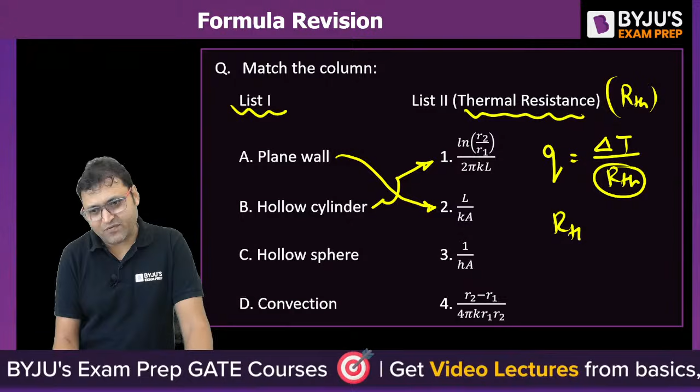We can find the unit of thermal resistance from this expression: delta T upon thermal resistance. So the unit of thermal resistance is delta T by Q, which can be called either Kelvin per watt or degree Celsius per watt. Both are correct. For a hollow sphere, it is R2 minus R1 upon 4 pi K R1 R2, where R1 is the inner radius and R2 is the outer radius. Do not get confused between cylinder and sphere.

If it is convection, then it is analyzed using Newton's law of cooling. According to Newton's law of cooling, Q equals H into surface area available for convection into bulk temperature difference. If we equate this with delta T upon thermal resistance, Q equals delta T upon thermal resistance, then the thermal resistance becomes 1 upon HA.

So it will be 2, 1, 4, 3. Isn't it? 2143. Very nice.

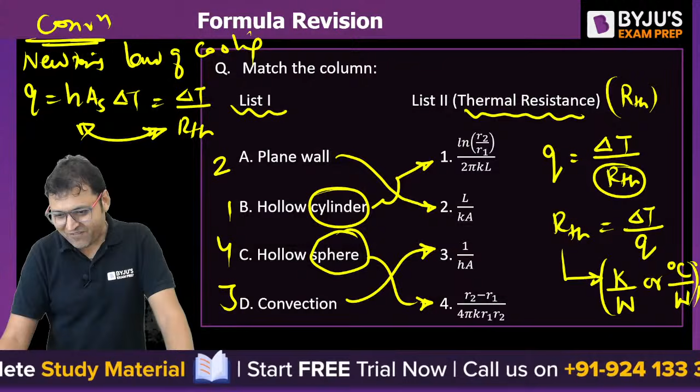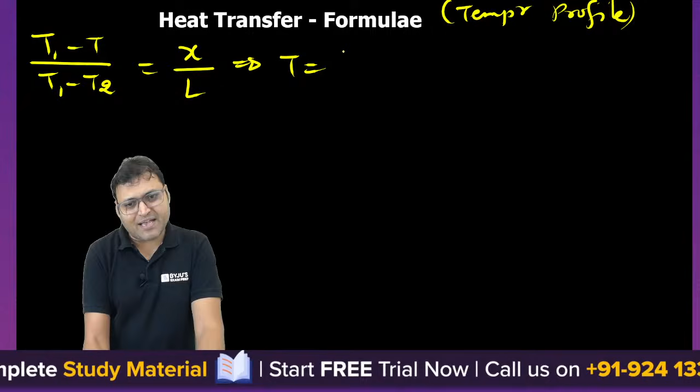Look at the temperature profile for various systems. Do you remember the formula for temperature profile? What is the nature of temperature profile in case of a plane wall? T1 minus T upon T1 minus T2, that is given by X by L. So temperature as a function of X will be linear. The nature of temperature profile will be linear in case of a plane wall.

In case of a plane wall, this is the formula. In case of hollow cylinder, what is the nature of temperature profile? This is the nature of the temperature profile in case of hollow cylinder, isn't it? The nature is logarithmic, for a hollow cylinder.

And the nature of temperature profile is 1 upon R1 minus 1 upon R, upon 1 upon R1 minus 1 upon R2, in case of hollow sphere. The nature of the temperature profile is hyperbolic in case of hollow sphere.

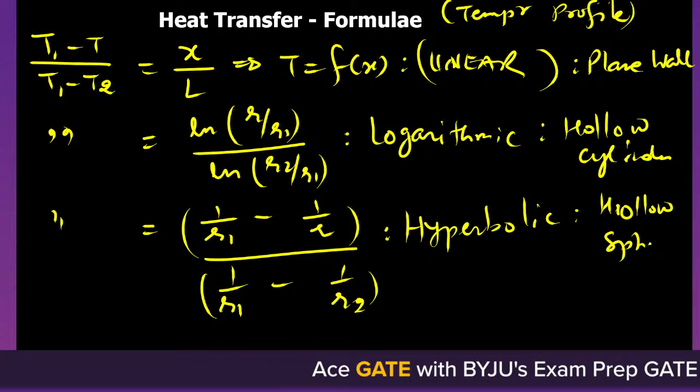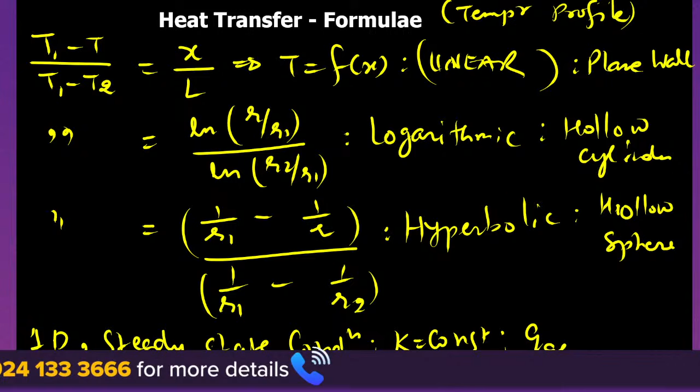But these formulas are valid only in case of one-dimensional steady state heat conduction, with constant thermal conductivity and no heat generation. If these assumptions are taken into consideration, then we can apply these formulas for the temperature profile.

What is the rate of heat transfer? Q equals KA delta T by L, which equals delta T upon thermal resistance. So we can say thermal resistance is given by L by KA, for a plane wall. And what is the rate of heat transfer in case of hollow cylinder? It is 2 pi KL delta T upon ln of R2 by R1. If we equate this with delta T upon thermal resistance, we can find the value of thermal resistance for a hollow cylinder.

What is the expression for Q in case of hollow sphere? It is 4 pi K R1 R2 delta T upon R2 minus R1, isn't it? That is equated with delta T upon thermal resistance, and we can find the expression for thermal resistance in case of hollow sphere.

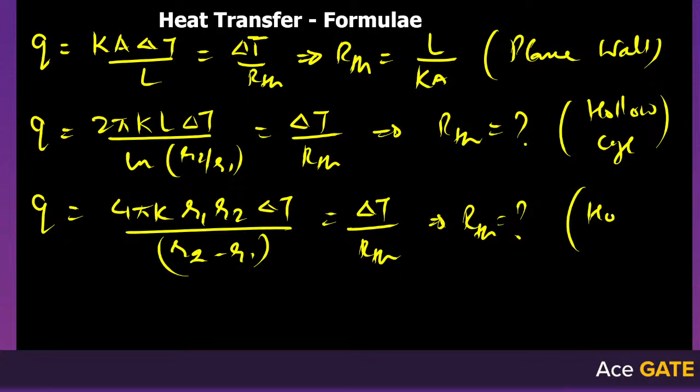These are the important formulas you should memorize. K is the thermal conductivity, L is the thickness, and in case of a cylinder, L is the length of the cylinder. I hope this is clear to everyone, isn't it? Let us move further.

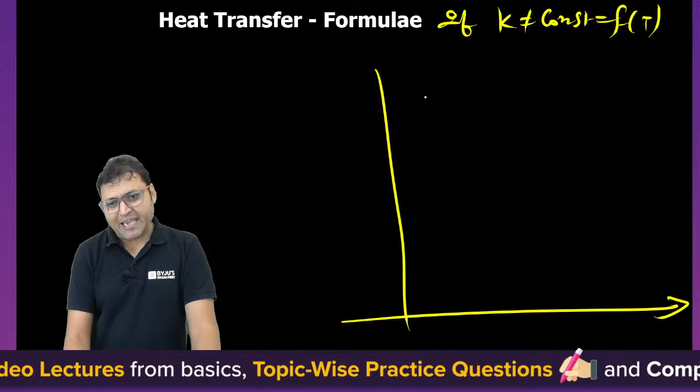How does thermal conductivity vary with temperature? Do you have any idea? If K is not constant, K is a function of temperature. So how does thermal conductivity vary with temperature? In case of liquid or conductor or metals, the thermal conductivity decreases as temperature increases. In case of gas or insulator or non-metal, the thermal conductivity increases with increase in temperature, and in case of a gas, the thermal conductivity is directly proportional to root T. I hope you are aware about this.

Hi Pejal World, good morning, welcome. Very nice. Money, well done guys, well done. Are you aware about that?

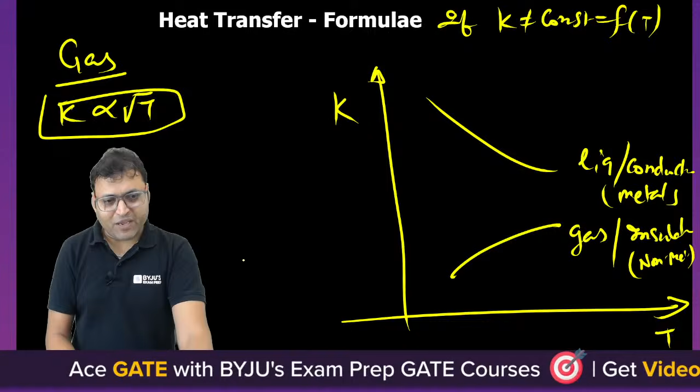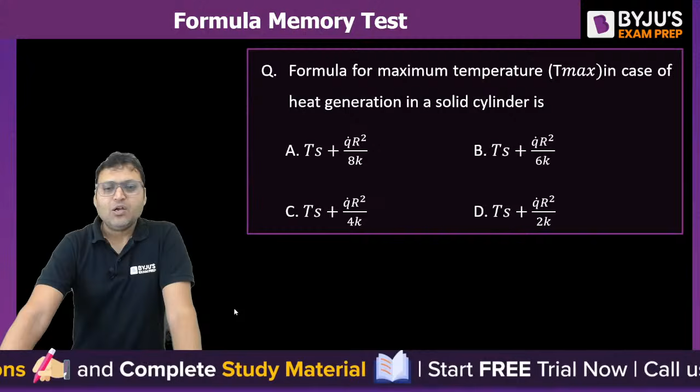Then again, an important concept. Whenever there is heat generation in the system, there can be heat generation in a plane wall, there can be heat generation in case of a cylinder, a solid cylinder, there can be heat generation in case of a solid sphere. Whenever there is heat generation, what will be the formula for maximum temperature in case of a solid cylinder? What will be the answer? Tell me first, you tell your answer, then I will tell mine.

Whenever there is heat generation, the temperature profile is a parabola. Temperature as a function of x is parabolic in nature. For a plane wall, temperature will be parabolic, and the rate of heat transfer is linear. If we talk about a plane wall, the temperature profile will be parabolic and the rate of heat transfer will be a linear function of x. The heat transfer will be taking place in two ways.

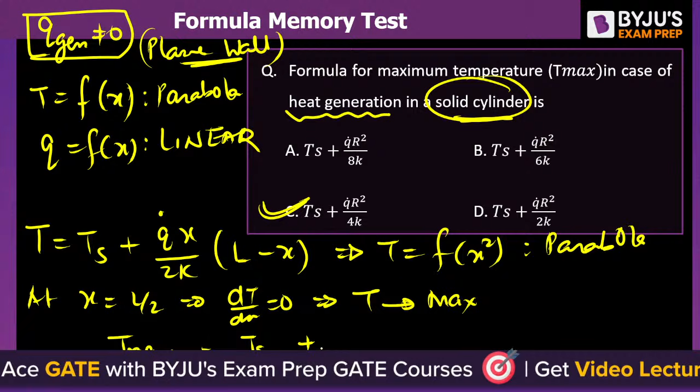If it is a solid cylinder, then this will be the maximum temperature. Let us talk about the plane wall first with heat generation. So the temperature profile is given by Ts plus Q dot x by 2K into L minus x. This is the expression for temperature profile, so we can say temperature is a function of x square, that is parabola. And at x equal to L by 2, dT by dx is equal to 0, so T will be maximum. The expression for maximum temperature is Ts plus Q dot L square by 8K.

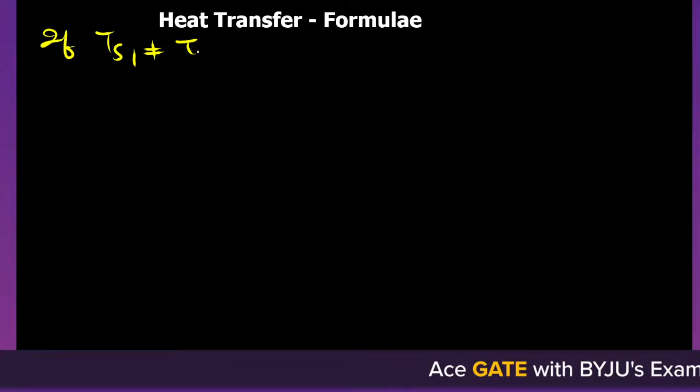This is when Ts1 equals Ts2 equals constant. When the inner surface temperature and outer surface temperature is Ts, then dT by dx will be 0 at x equal to L by 2, and T maximum is Ts plus Q dot L square by 8K. If Ts1 is not equal to Ts2, then T maximum can be calculated by either Ts1 plus Q dot by 8K into 2L1 whole square, or we can write it as Ts2 plus Q dot by 8K into 2L2 whole square. So this is the expression.

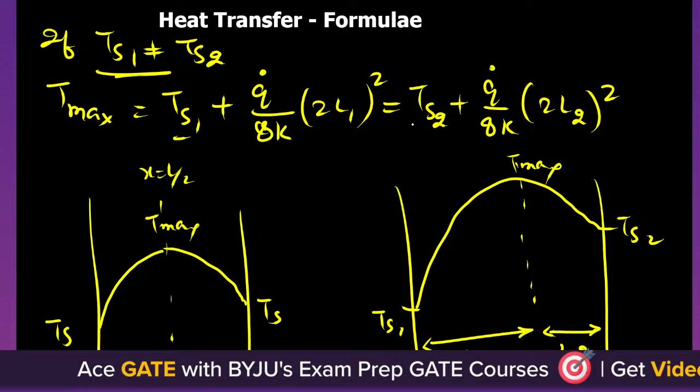If we draw for Ts1 equal to Ts2, the parabola will be symmetrical about the mid plane because this is also Ts, this is also Ts, so the maximum temperature is at x equal to L by 2. But if Ts1 is not equal to Ts2, if Ts1 is less than Ts2, then the parabola will be something like this. So this is the point of maximum temperature, here the temperature will be maximum. This distance is, let us say, L1, this distance is L2. So by using L1, L2, Ts1, Ts2, we can find out the expression for maximum temperature.

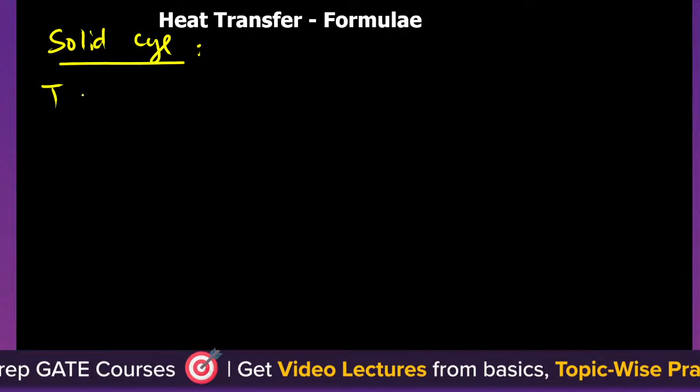And Q will be 0 where the temperature is maximum, because dT by dx is 0 there. The direction of heat flow will be towards left also, towards right also - the direction of heat transfer will be left and right on both sides. In case of a solid cylinder with heat generation, T is equal to Ts plus Q dot by 4K into capital R square minus small r square. It is a parabola, and Q is a function of R square.

Q is a function of R square. At R is equal to 0, center temperature will be maximum, that is equal to Ts plus Q dot capital R square by 4K. If it is a solid sphere with heat generation, then T is equal to Ts plus Q dot by 6K into capital R square minus small r square. It is also a parabola.

And Q is a function of R cube. At R is equal to 0, temperature is maximum, that is Ts plus Q dot by 6K into R square, where Q dot is watt per meter cube, that is rate of uniform heat generation per unit volume.

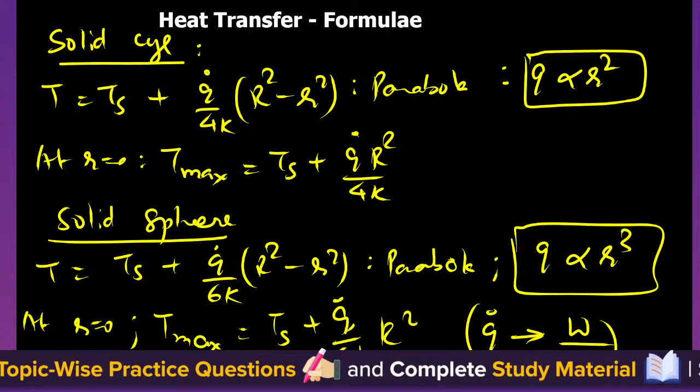So the correct answer to the given question is option C. This is for solid sphere. This would have been for a solid sphere. And Q dot L square by 8K, there is no R. Q dot L square by 8K would have been for a plane wall.

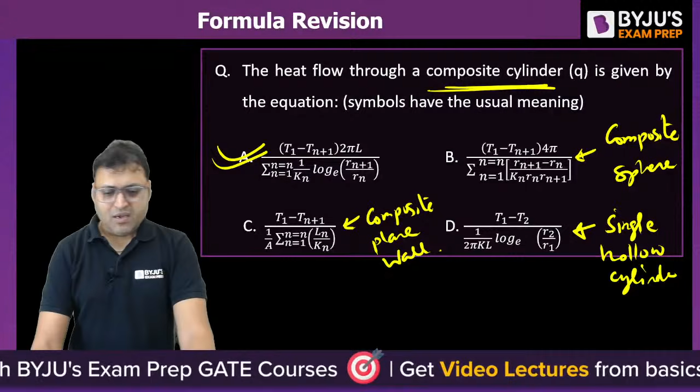Let us try to understand the composite system. Q, which is equal to delta T upon thermal resistance, can be written as U into A into delta T overall. That remains constant. So from here we can say U is equal to 1 upon A into thermal resistance.

For a composite, U is the overall heat transfer coefficient.

Hi Arnab, good morning. I am all fine. How are you?

Overall heat transfer coefficient. And what is the thermal resistance? If there is a convection also, then it will be 1 by A, 1 upon Hi plus summation of J is equal to 1 to N, Lj by Kj plus 1 upon H naught.

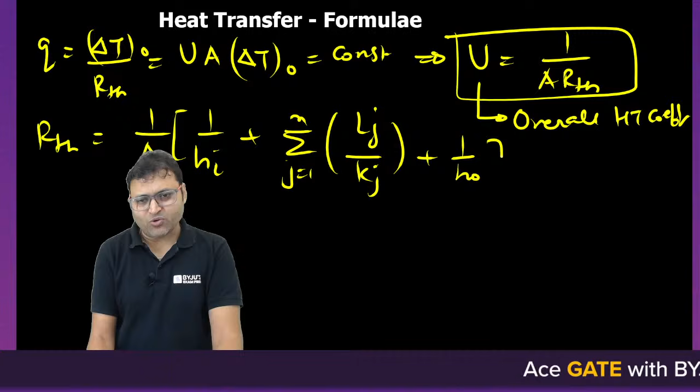If there is no convection given, then delta T upon RTH will give you Q. Or if you want to find out the thermal resistance, then this will be the expression for a plane wall, or composite wall. This is the expression for a composite wall.

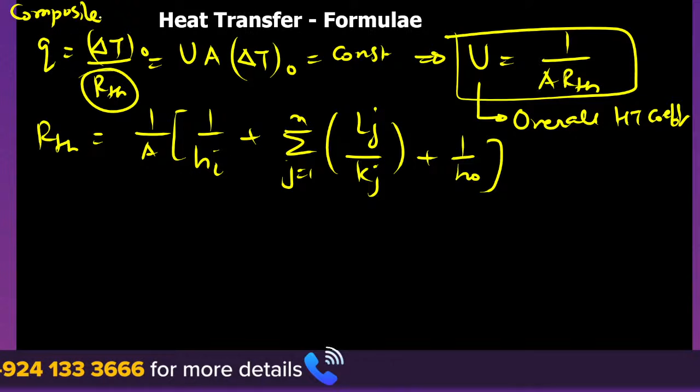For a composite cylinder,

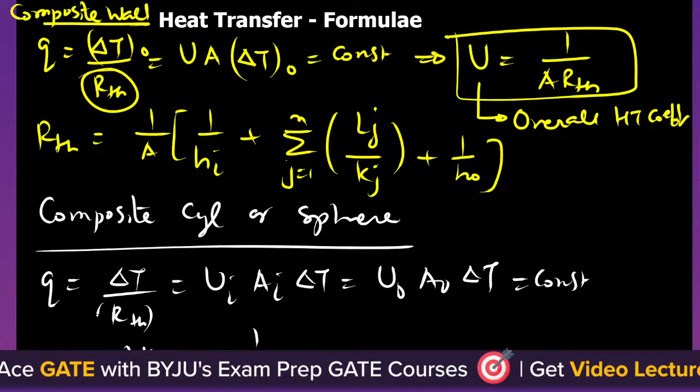From here we can write Ui as 1 upon Ai into R equivalent. This is R equivalent, let me write it as equivalent thermal resistance. And U0 is equal to 1 upon A0 into R equivalent.

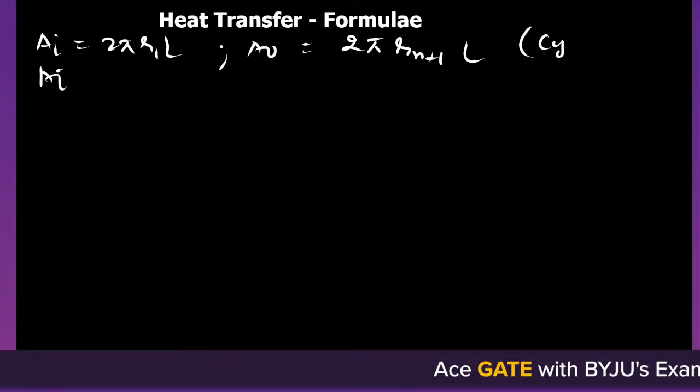Ai and A0: Ai is equal to 2 pi R1L for a cylinder, and A0 will be equal to 2 pi Rn plus 1 into L. For a sphere, this is for a cylindrical system, and for a spherical system it is 4 pi R1 square, and A0 will be equal to 4 pi Rn plus 1 square for a sphere.

R equivalent for a cylinder is equal to 1 upon 2 pi L, then 1 upon Hi into R1 plus summation of j equal to 1 to n, then ln of rj plus 1 upon rj, upon kj, then plus 1 upon h naught into rn plus 1. This is the expression for a cylinder.

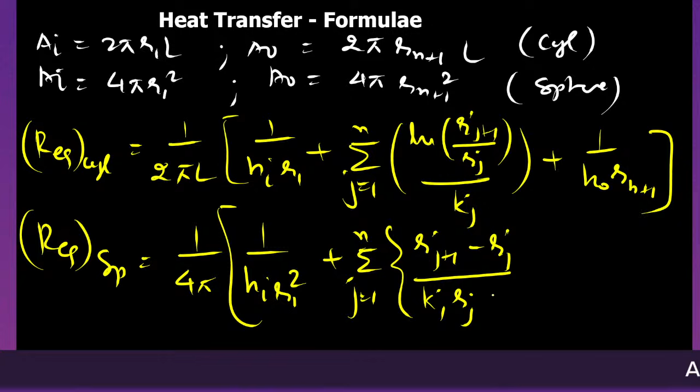And R equivalent for a sphere will be equal to 1 upon 4 pi, then 1 upon hi into r1 square plus summation j equal to 1 to n, then rj plus 1 minus rj upon kj, plus 1 upon h naught into rn plus 1 square.

These are the expressions for equivalent thermal resistance for a composite cylinder as well as composite sphere. I hope this is clear. So the session is about the revision of the important formulas.

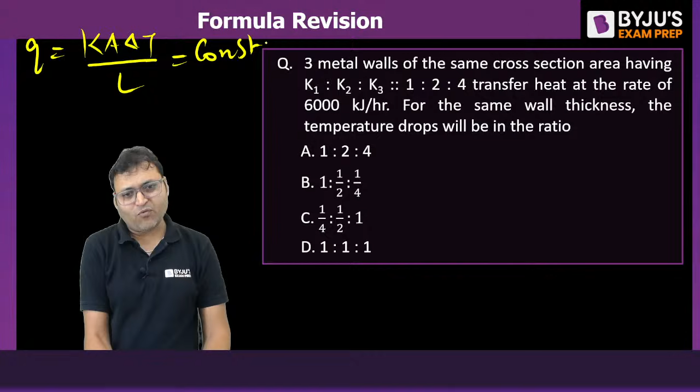We can say Q equals Ka delta T by L remains constant because the walls are in series. For series combination, Q remains constant. Thickness and cross-sectional area are the same, so delta T is inversely proportional to thermal conductivity. So delta T1 : delta T2 : delta T3 equals 1/K1 : 1/K2 : 1/K3, that is 1 : 1/2 : 1/4. B will be the correct answer.

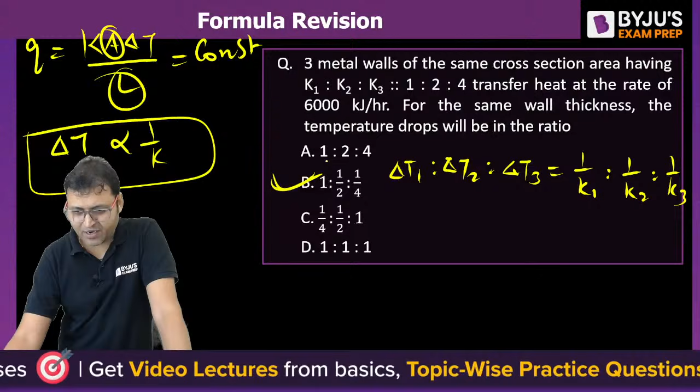Yes, Arnab, Pejal, Naruto, well done Vinay, good.

So whenever the resistances are connected in series, for series combination, Q will remain constant. And delta T, overall thermal potential, will be delta T1 plus delta T2 plus delta T3 and so on. So equivalent thermal resistance will be the sum of R1 plus R2 plus R3 and so on.

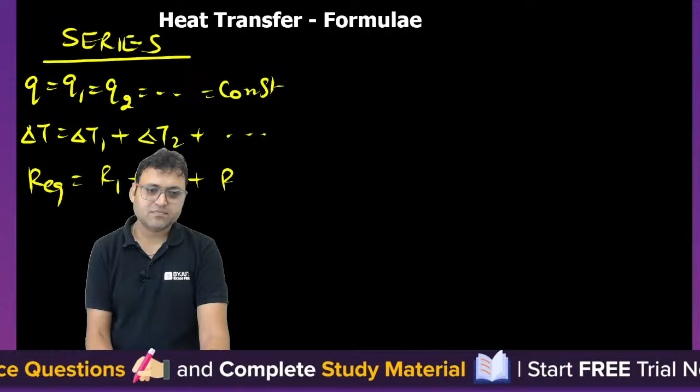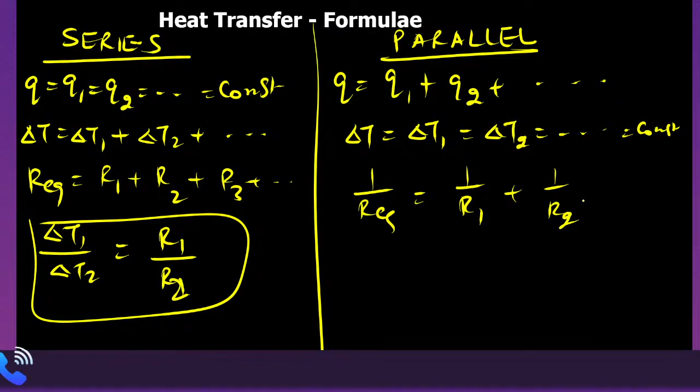From here, delta T1 by delta T2 is equal to R1 by R2, that is for the series combination of thermal resistances. And if the thermal resistances are connected in parallel, then Q will be Q1 plus Q2 plus Q3. Overall thermal potential is the same as the thermal potential across resistance 1 or resistance 2 and so on, delta T remains constant. So 1 upon equivalent thermal resistance will be 1/R1 plus 1/R2 plus so on. From here, Q1 by Q2 equals R2 by R1 for parallel resistances, right?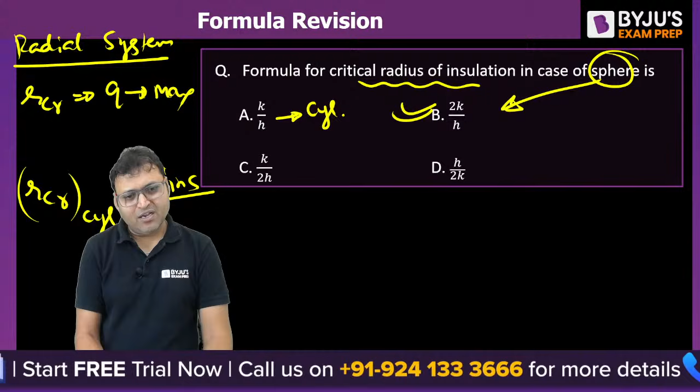The formula for critical radius of insulation in case of a sphere is 2K by H. If it would have been a cylinder, it would have been K by H, for the radial system. Up to RCR, the critical radius of insulation, Q will become maximum. So the RCR for a cylinder will be equal to K of insulating material upon H outside, and RCR for a sphere will be equal to twice K of the insulating material upon heat transfer coefficient of the medium in contact with the insulating material.

Sometimes thickness of insulation is also asked. TCR equals RCR minus R naught. That is called critical thickness of insulation, which gives the maximum heat transfer rate.

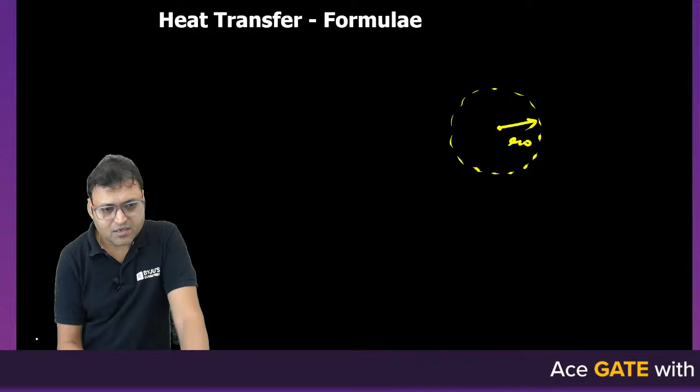Critical thickness, this is simple, but one thing is asked many times. This is the original radius, let's say, for a radial system. This is let's say R naught and this is let's say RCR, critical radius. So when the radius equals the critical radius, the heat transfer rate will become maximum and then it will decrease. Here Q will be maximum.

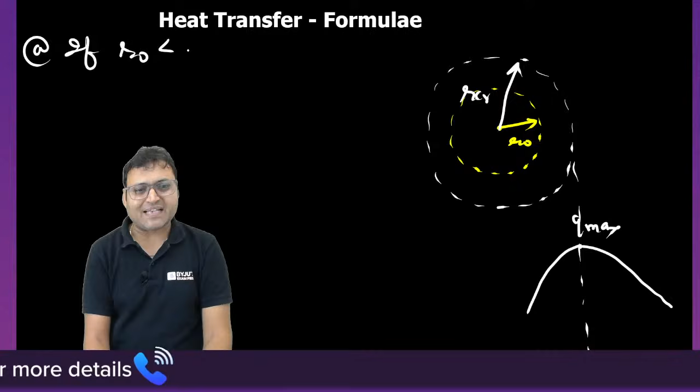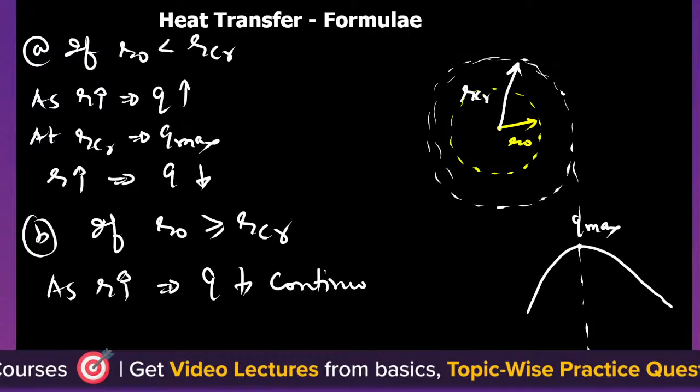So the question asked is, if R naught is less than RCR, then as R increases, Q will increase, then become maximum. At RCR, Q will become maximum, and then if R further increases, it will start decreasing the value of Q. But if R naught is greater than or equal to RCR, then as R increases, the rate of heat transfer will decrease continuously.

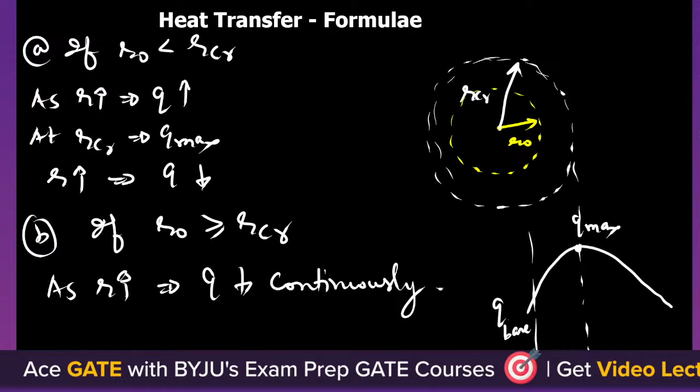Do you understand this? So without insulation, this is Q bare. Then there is an increase in Q, and it is maximum corresponding to RCR; this is corresponding to R naught, and then further increase in radius of insulation will decrease the value of Q beyond RCR.

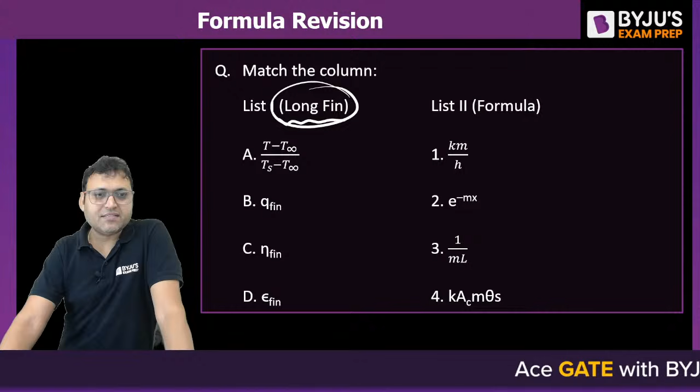A is the temperature profile. B is the rate of heat transfer from the fin, and C is thermal efficiency of the fin, that is the thermal performance parameter, and the next one is the effectiveness of the fin, that represents the economic performance of the fin.

Bataiye, for a very long fin, when do we call the fin to be very long? If M into L is greater than or equal to 5, we can assume a very long fin. What is M here? M is under root of HP by K into cross-sectional area, the unit is meter inverse, which is called the fin constant. When M into L is greater than 5, we can call it a very long fin.

So this is the temperature profile: T minus T infinity upon Ts minus T infinity, that is theta by theta s, is given by e to the power minus Mx. The variation is exponential. M is under root of HP by KA. P is the perimeter, K is the thermal conductivity, AC is the cross sectional area. X is the distance from the root of the fin.

Then Q fin, the heat loss from the fin, is given by KAM theta s, or we can write it as under root of HP K into AC into theta S. What is theta S? Theta S is Ts minus T infinity. So Q fin is directly proportional to root K, it will not be proportional to K because there is an M, the fin constant. So put the value of fin constant, that is under root of HP by KA, then you will get the expression for Q fin like this.

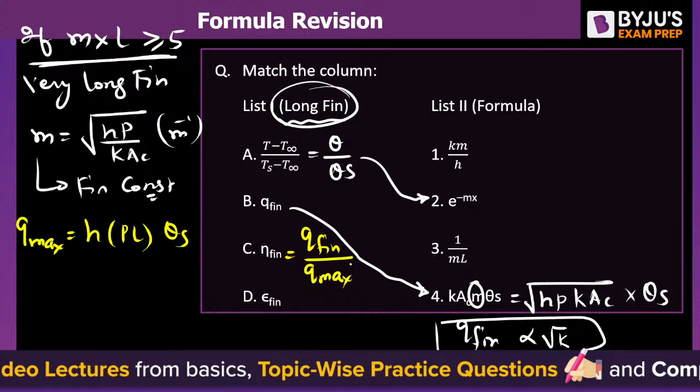The third one is fin efficiency. What is the efficiency of the fin? That is the ratio of Q fin upon Q maximum, the maximum heat loss from the fin. The value of Q maximum is when the entire fin is maintained at the base or root temperature, so in that case it will be H into PL into theta S. If you divide these two, you will get the expression for fin efficiency as 1 upon M into L. And the efficiency of the fin, or effectiveness of the fin, is given by the expression.

What is effectiveness? That is the ratio of Q fin to Q without fin, or Q bare, when there is no fin attached. Q without fin is given by H into AC into theta S when there is no fin. So if you take the ratio, you will get the effectiveness of the fin as KM by H. Effectiveness of the fin can have a value less than 1, equal to 1, or greater than 1. Whereas the efficiency of the fin is always less than 1.

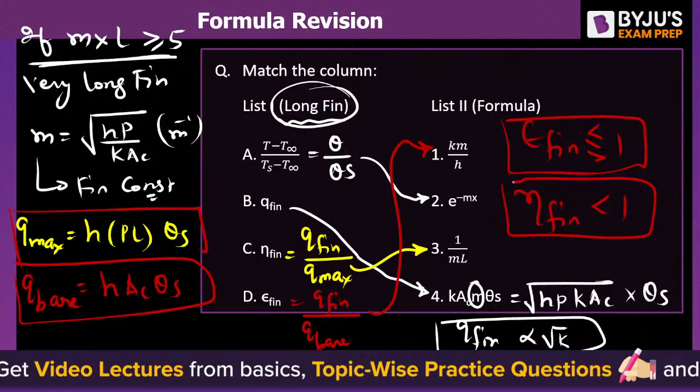So A2, B4, very nice, C3 and D1. Well done, Arnab. 4-3, 2-4-3-1, 2-4-3-1. Vinay, good.

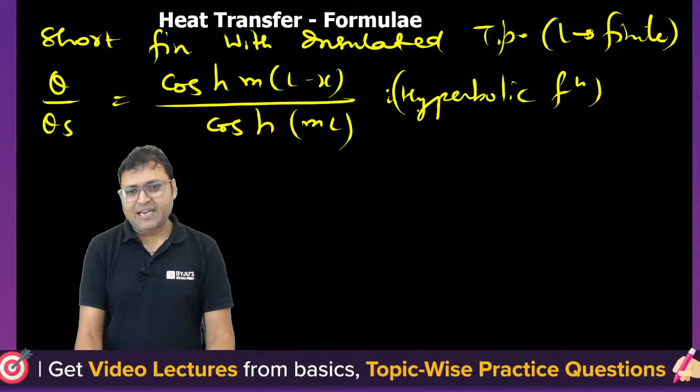But if the fin is short, if there is a short fin with insulated tip, what is the nature of the temperature profile for a short fin with insulated tip? Can you find out when L is finite? What is the temperature profile? Theta upon theta S is equal to cos hyperbolic M into L minus X upon cos hyperbolic ML, that is a hyperbolic function. The nature of the temperature profile is hyperbolic for a short fin with insulated tip.

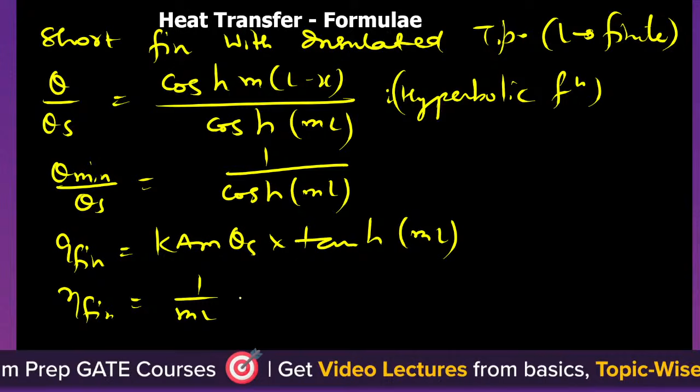And if we find out theta minimum upon theta S, then it will become 1 upon cos hyperbolic ML. And Q fin is equal to KAM theta S into tan hyperbolic ML, a hyperbolic function. Efficiency of the fin will become 1 upon ML into tan hyperbolic ML. Effectiveness of the fin will be equal to KM by H into tan hyperbolic ML. These are the expressions, these are the formulas for the short fin with the insulated tip.

When there is a short fin with free tip, short fin with free or convecting tip, when there is convection from the tip, then what we will do is L will be replaced by characteristic length, correction length. And what is the correction length? L will be replaced by correction length, and assume it as short fin with insulated tip.

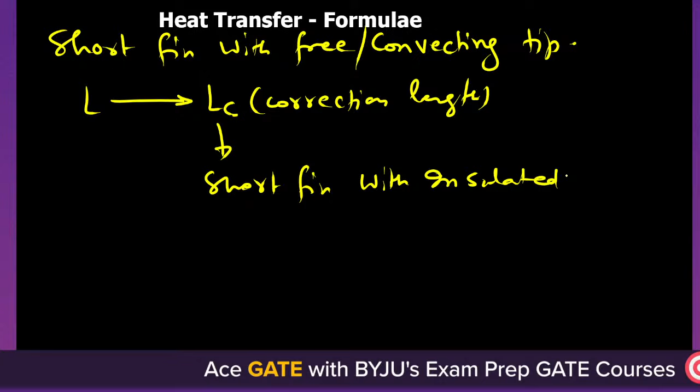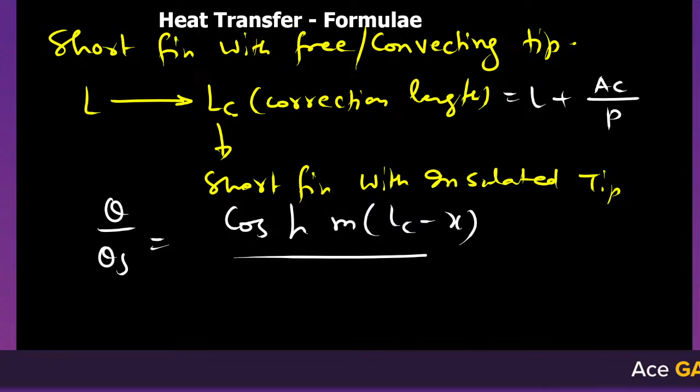Replace the value of L with LC and use the formula for short fin with insulated tip. What is the correction length? Correction length is equal to L plus the ratio of cross sectional area by perimeter, L plus A by P. So we can say theta upon theta S equals cosh M(LC minus X) upon cosh M LC. This will be the formula for temperature profile, which is also hyperbolic.

So these are the various parameters regarding the fin theory. These are the three cases we analyze, and the last topic in conduction is lumped system analysis, or unsteady state conduction.

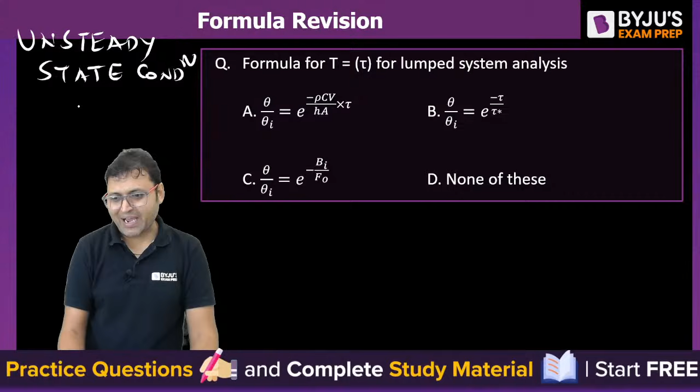What is the formula for unsteady state conduction? Temperature versus time. Unsteady state means when the temperature becomes a function of time. T is for temperature and tau is for time.

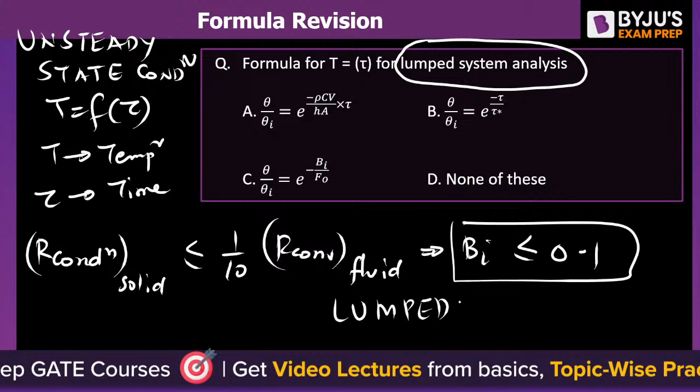What do you understand by the term lumped system analysis? When do we have lumped system analysis? When the conductive thermal resistance of the solid, R conduction, is less than or equal to 1/10 of the convective thermal resistance of the fluid. Or we can say when the Biot number is less than 0.1, we can assume the system to be a lump system, and the analysis is called lumped system analysis.

And for the lumped system analysis, theta upon theta I is given by... what is the correct answer? B will be the right answer for this one.

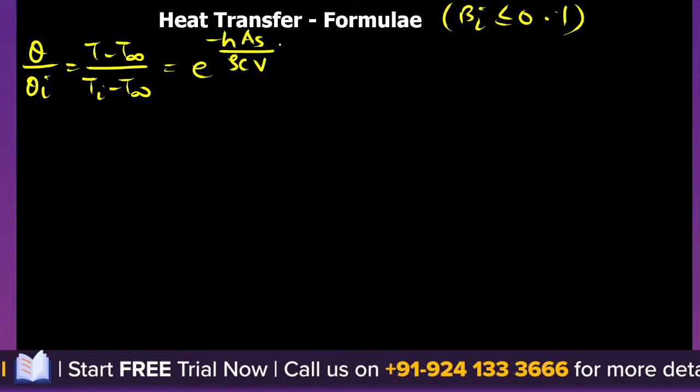When Biot number is less than 0.1, theta upon theta I, that is T minus T infinity upon Ti minus T infinity, is equal to e to the power minus HA by rho into C into volume into tau, where As is the surface area available for heat transfer. This is written as e to the power minus B into tau, or e to the power minus tau upon tau star.

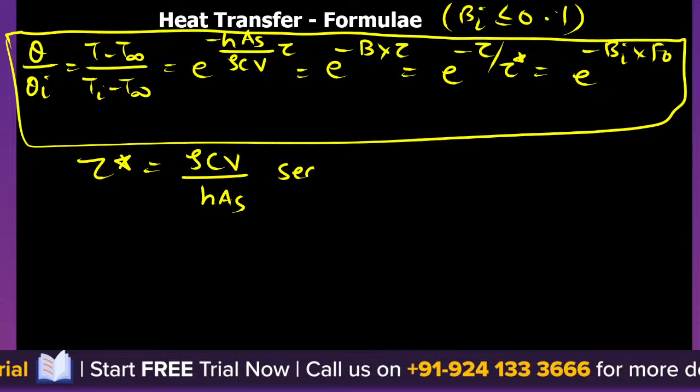What is tau star? Tau star is called the time constant of the thermocouple, written as e to the power minus Biot number into Fourier number. This is the expression when we assume the system to be lump system, where tau star equals rho CV by H into surface area, with unit second, called the time constant, which is 1 by B.

B is the thermal response. Biot number is equal to the ratio of conductive thermal resistance in the solid to the convective thermal resistance in the fluid, and the expression is H into LC by K, where K is for the solid.

What is LC? LC is equal to volume per unit surface area, and the Fourier number is given by Q conduction upon Q stored, the ratio of heat transferred due to conduction to the heat stored, that is alpha into tau upon LC square, where alpha is equal to K by rho C, rho into C.

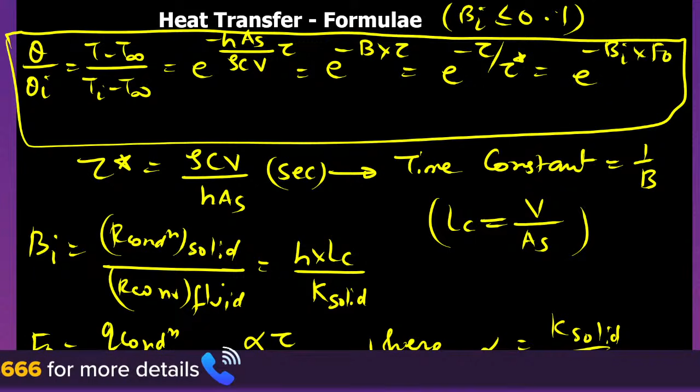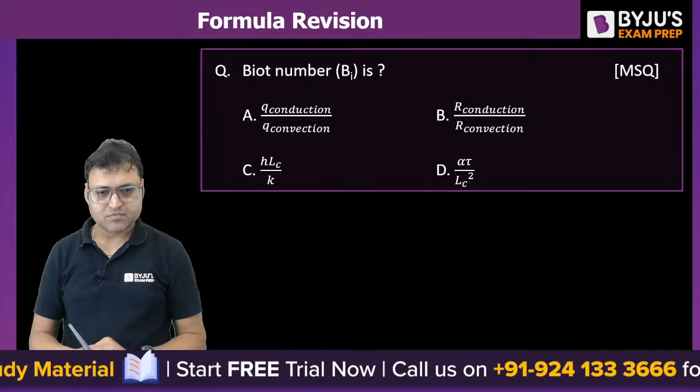These are the various formulas for analyzing lump system analysis, for analyzing unsteady conduction when the Biot number is less than 0.1. What is the answer for this one? Biot number: alpha tau by LC square is Fourier number, HLC by K is the Biot number, which is the ratio of R conduction to R convection.

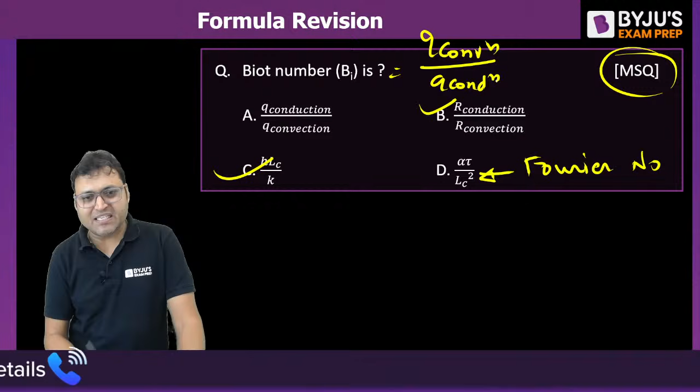It is actually an MSQ. So the answer is B and C. It would have been A if Biot number was Q convection upon Q conduction, but option A is the reciprocal of Biot number, so A is not correct. B and C are the correct answers.

And we can find out the rate of heat transfer Q tau. If Biot number is less than 0.1 for the lump system analysis, Q equals H into A into (T minus T infinity), or minus rho CV into dT by dtau.

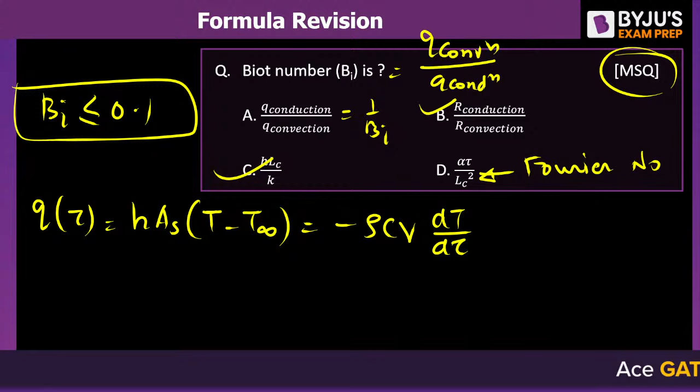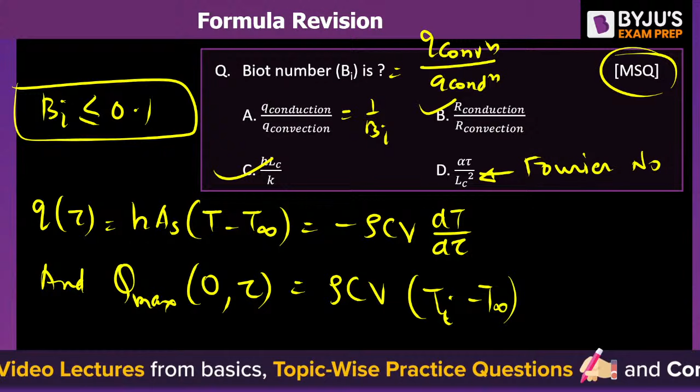And Q maximum can be calculated as the maximum heat loss between the time interval 0 to tau, equal to rho CV, or M into C, into (Ti minus T infinity). That is the maximum heat loss. The unit of this expression is joule, and the rate is joule per second, or watt.

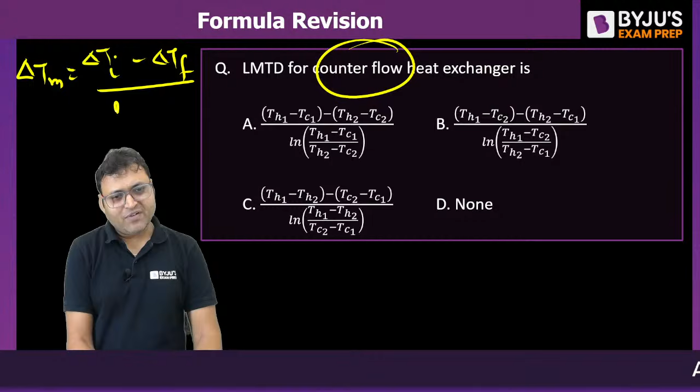For a counterflow heat exchanger, the two fluids flow opposite to each other. What is LMTD? It is equal to delta Ti minus delta Tf upon natural log of delta Ti by delta Tf. This is the formula for LMTD.

If it would have been a parallel flow heat exchanger, like this is hot fluid, this would have been cold fluid, this is TH1, this is TH2, TC1, TC2. So delta Ti would have been TH1 minus TC1, and delta Tf would have been this. So we could have put the values here: Th1 minus Tc1 minus Th2 minus Tc2, upon natural log of delta Ti by delta Tf.

If it would have been a counterflow heat exchanger, this is hot fluid, this is cold fluid. For a counterflow heat exchanger, what is delta Ti? This is Th1, this is Th2, this is Tc1, this is Tc2. This distance is delta Ti and this will be delta Tf. So the expression for LMTD for counterflow heat exchanger will be Th1 minus Tc2, minus Th2 minus Tc1, upon natural log of Th1 minus Tc2 upon Th2 minus Tc1. This is for counterflow heat exchanger.

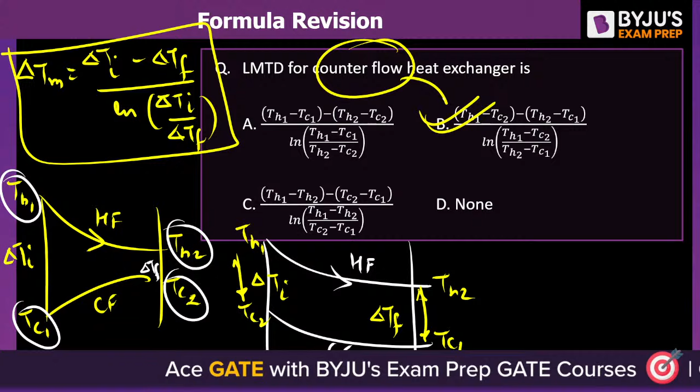Option A is for parallel flow heat exchanger. This is for parallel. Isn't it?

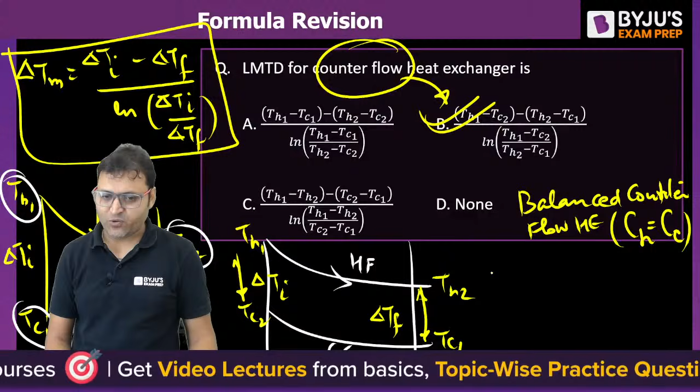And for counterflow heat exchanger, or balanced counterflow heat exchanger - what is the meaning of balanced counterflow heat exchanger? When the product of mass flow rate into specific heat for the hot fluid is the same as the product of mass flow rate into specific heat of the cold fluid - capital CH, capital CC is mass flow rate into specific heat, that is heat capacity rate. If the heat capacity rate of the hot fluid is the same as the cold fluid, then the temperature profile would have been a straight line - they are parallel and straight lines, hot fluid and cold fluid.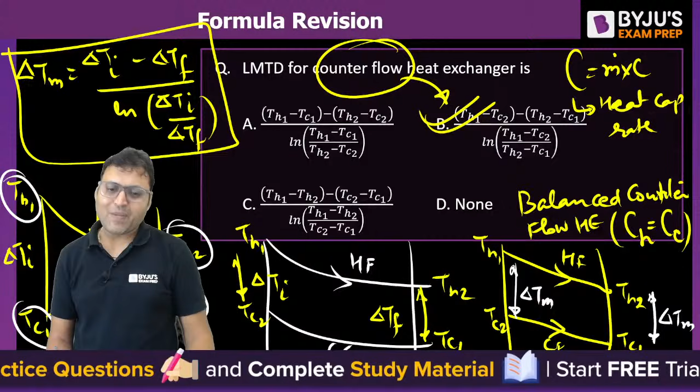So LMTD will be, this is Th1, this is Tc2, this is Th2, this is Tc1. Either we write LMTD to be Th2 minus Tc1, or we can write LMTD as Th1 minus Tc2. LMTD will be calculated by taking the difference of TH1 minus TC2 or TH2 minus TC1. All right, this is for the LMTD.

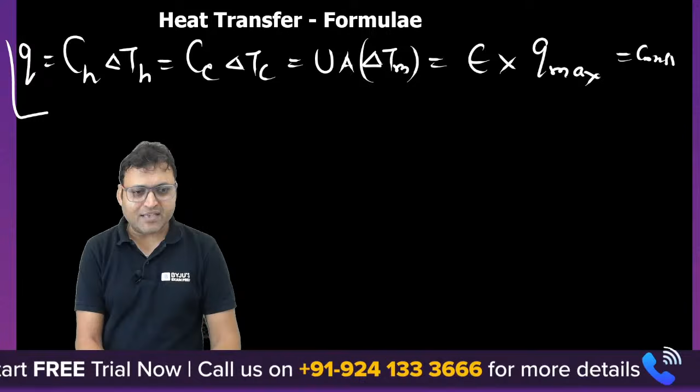So the rate of heat transfer can either be calculated by CH into delta TH or CC into delta TC, or we can write it as U into A into mean temperature difference, that is LMTD, or effectiveness into Q maximum, that remains constant - that is called heat load or thermal capacity of the heat exchanger. Capital CH is the heat capacity rate of the hot fluid.

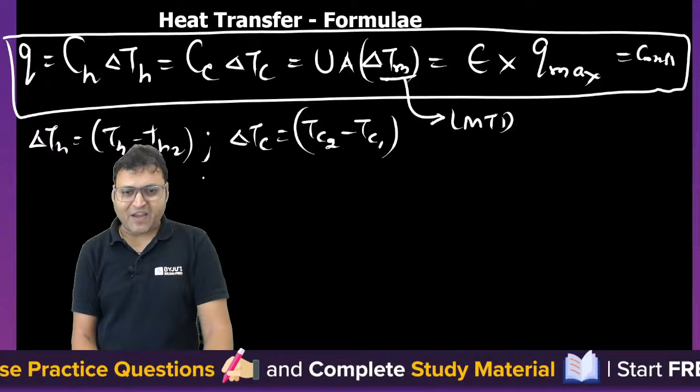Delta TH, what is delta TH? Delta TH is TH1 minus TH2. Delta TC is TC2 minus TC1. Delta TM we have already discussed, this is LMTD. And what is effectiveness? Effectiveness is the ratio of Q by Q maximum.

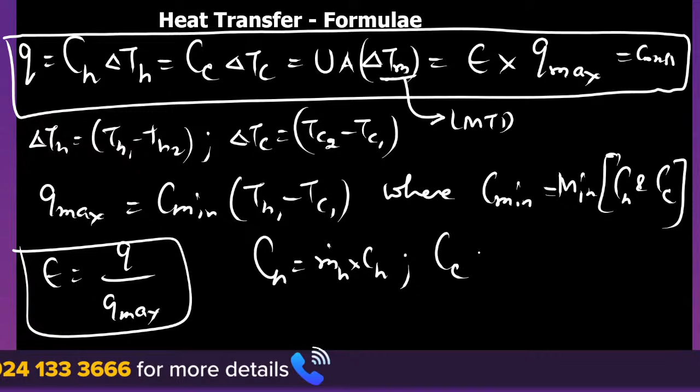So Q maximum is equal to C minimum into TH1 minus TC1, where C minimum is equal to the minimum among CH and CC. That is Q maximum. And effectiveness is given by Q upon Q maximum - that is the effectiveness of the heat exchanger, right? Capital CH is equal to mass flow rate of hot fluid into specific heat of hot fluid, and capital CC is the product of mass flow rate of the cold fluid into specific heat of the cold fluid, right?

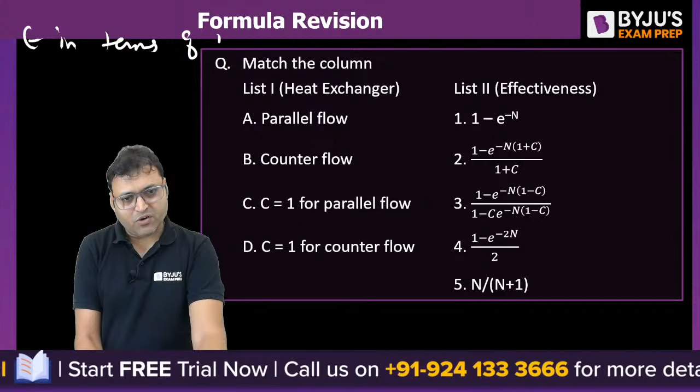And there is another expression in terms of NTU - effectiveness in terms of NTU. Do you know how to write the effectiveness in terms of NTU? The next question is regarding that only - effectiveness in terms of NTU. Can you solve it? Can you let me know?

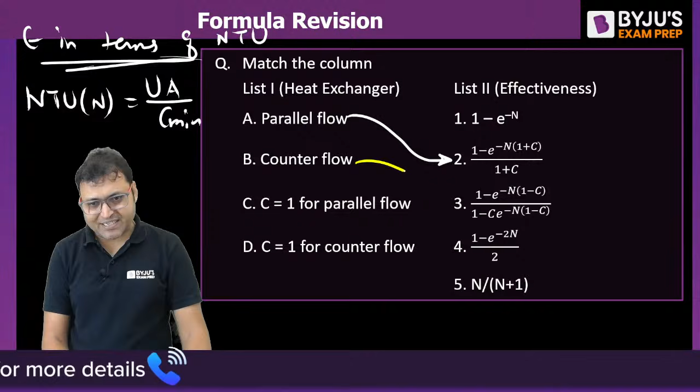For a parallel flow, what is NTU? NTU is given by, which is denoted by N, UA by C minimum. Again, C minimum is the minimum among CH and CC. Yes, for a parallel flow heat exchanger, effectiveness is given by 1 minus E to the power minus N times 1 plus C, upon 1 plus C - for a parallel flow heat exchanger. For a counterflow heat exchanger, the expression is 1 minus E to the power minus N times 1 minus C, upon... what is C here? Where C is C minimum by C maximum, that is heat capacity ratio.

Ratio of heat capacities. It is not the ratio of specific heats, it is the ratio of heat capacities.

Then for C equal to 1. When is C equal to 1? C is equal to 1 if CH is equal to CC, or delta TH is equal to delta TC. Then it will be C is equal to 1.

If C is equal to 1 for parallel flow, put the value C is equal to 1 in case of parallel flow heat exchanger. This is the formula for parallel flow. If you put C is equal to 1, then the expression will be this.

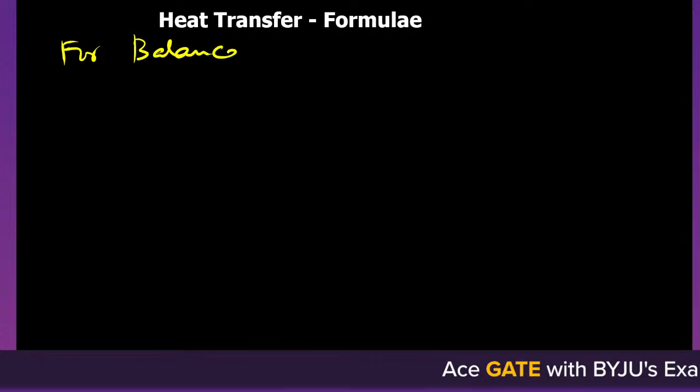And C is equal to 1 for counter flow. If you put the value C is equal to 1 for counter flow, you will get 0 by 0 form, for balanced counter flow heat exchanger. What does that mean? CH is equal to CC, or C is equal to 1. Then you will use L'Hospital's rule.

And effectiveness is given by NTU upon NTU plus 1. That is the formula. And for C is equal to 0, it means either it is a condenser if there is a phase change, or evaporator, or cascade heat exchanger.

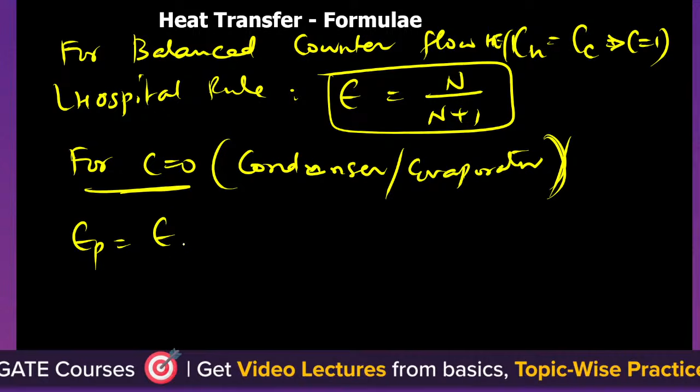Then for C is equal to 0, parallel flow, counter flow and cross flow all have the same expression: 1 minus e to the power minus NTU. That is for C is equal to 0.

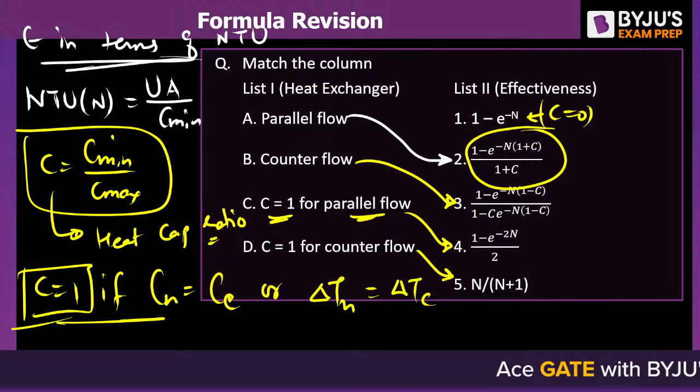So the answer will be 2, 3, 4, 5. For the given question, the answers will be 2, 3, 4, 5. I hope this is clear. These are the formulas you should have an idea of for getting your answer correct.

The balanced counter flow heat exchanger is very, very important from your examination point of view. Can you just solve this question? Yes, every one of you, please give it a try.

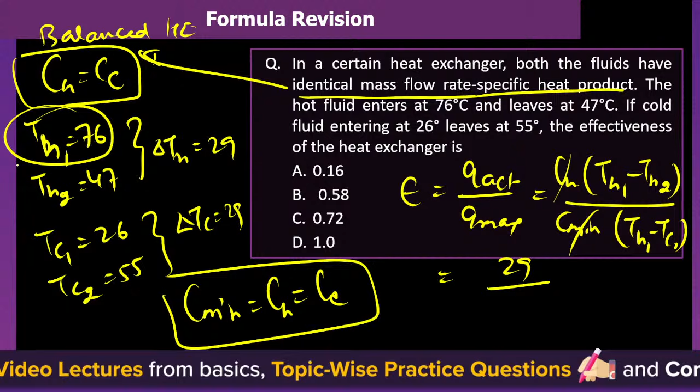Now what we need to find out, because CH is equal to CC, is the effectiveness. What is effectiveness? That is Q actual by Q maximum. So Q actual we can write as CH into TH1 minus TH2. Here it will be C minimum into TH1 minus TC1. C minimum will either be CH or CC because it is a balanced counterflow heat exchanger. So 29 divided by TH1 minus TC1.

76 minus 26, what is this? 29 divided by 50, isn't it?

29 divided by 50, what is the answer? Are you getting option B or not? 0.58, it is close to 0.58. It is something around 3 by 5, around 3 by 5, 0.6, close to 0.6. So 0.58 is the more appropriate answer.